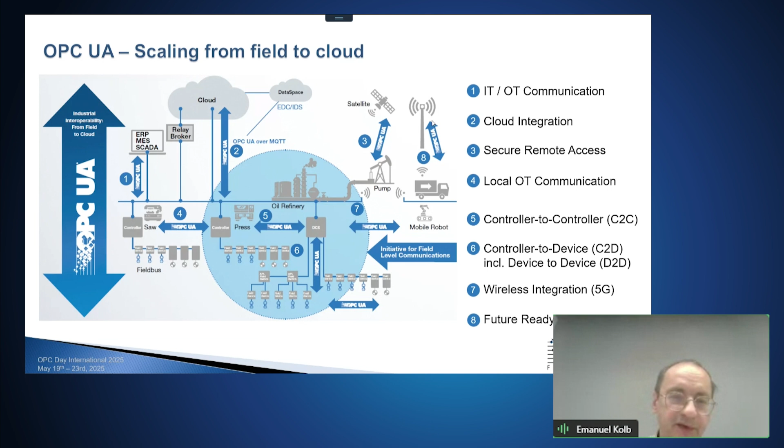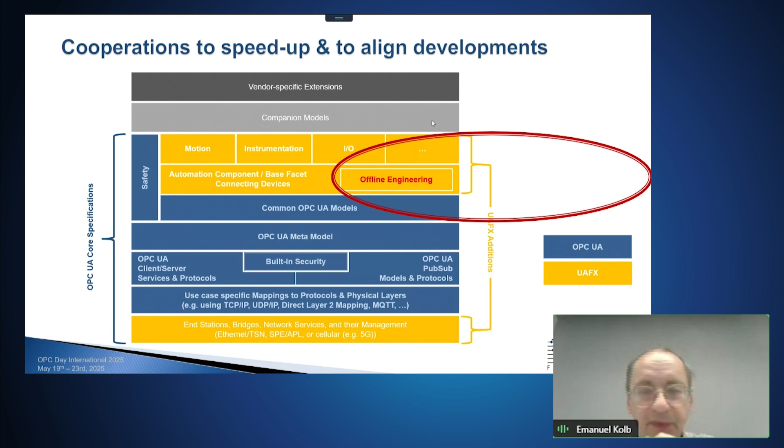And this also brought UAFX to the decision that we have to support offline engineering. We have to make ideas about engineering tools. We maybe even have to provide software tools for supporting engineering in a plant. And this was from the beginning seen as one important step. And as you see here, the technologies used.

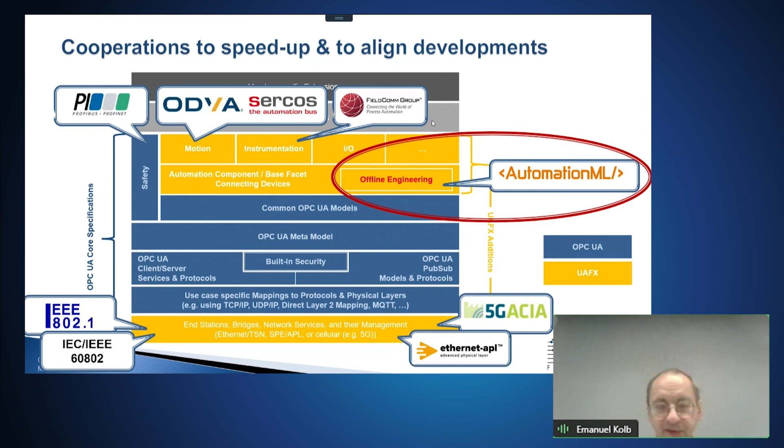One technology that came new into the OPC UA world is AutomationML, which is an engineering language for modeling information for a wide area of engineering topics, going far beyond what OPC UA is currently doing. So the interesting challenge of this project was to bring the AutomationML modeling and language together with what OPC UA is offering, the OPC UA information model. This project was started in a project group that in the end created the Part 83 standard of UAFX.

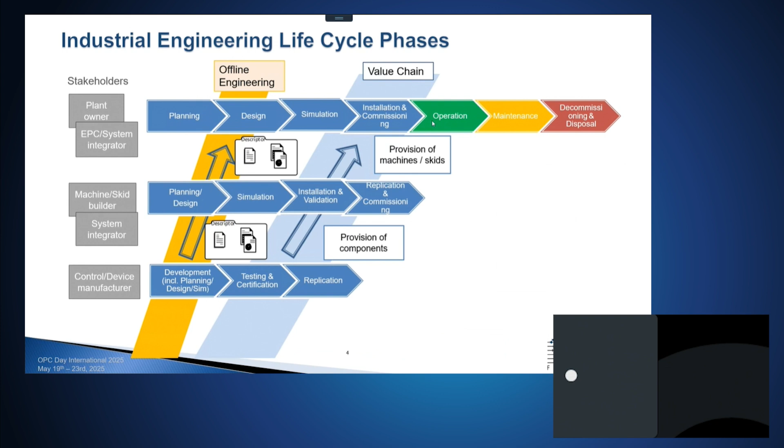Making a little bit more of a point on this, as you see here, the classic value chain for a plant is selecting products, selecting automation devices, integrating them into a larger module system, and finally bringing them to the plant, wiring everything together, pressing the start button, powering it up, and then it should run. But it will only run if you do planning before, and this is the orange chain here, which is ongoing in parallel. Everything you do, you plan in a digital way before with some tools.

Even if you have not procured the hardware yet, you have to deal with the devices. You have to select your products based on paper information. You have to create the engineering of your controllers, maybe without the controllers even in place, and later, of course, bring this together with the hardware. So this is the digital value chain that accompanies the real value chain where you make the production site happen.

And here, a new concept was developed in UAFX, which is called the descriptor, which is a way to share and encode the information you create during engineering. It's not a digital twin. In the beginning, we discussed going in that direction too. It's more a kind of data collection information model that helps you keep your information together. It's not as high level as a digital twin, but I think it could also contribute to a digital twin in the future.

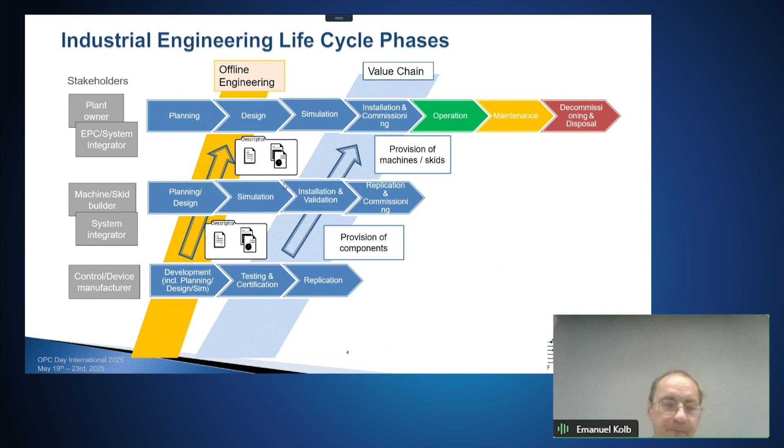And here you see a little bit of what our project group tries to bridge. We try to bridge current industrial engineering, which uses a lot of different modeling concepts, with the online running stuff, the UA server, where the OPC UA information model is and where the communication happens. So we try to bring this together and make a fusion out of that.

And as I said, the two concepts we're inventing here are, on the one hand, the descriptor as a kind of container for collecting and sharing engineering information, and on the other, a mapping where we bring the OPC UA information model language together with the AutomationML language.

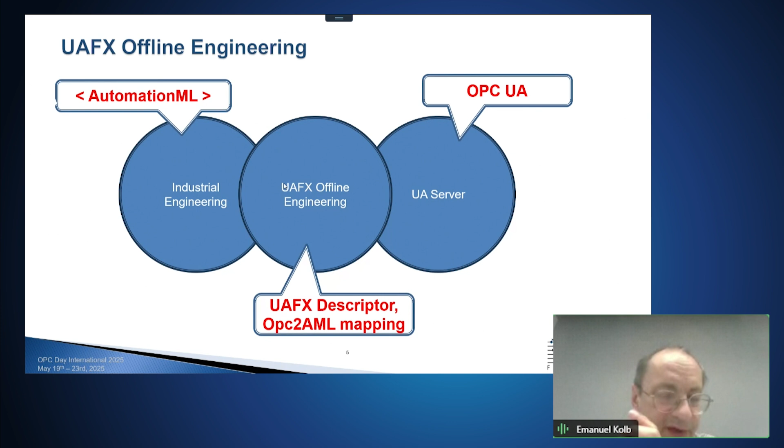And this is going a little bit into detail about where a descriptor is used and what is the basic use case, a kind of baby use case for sharing information. This is one of our first examples we did. It's about creating a control engineering project.

So a control engineer A would do some configuration for a controller which may not exist yet, and share this information with another engineer for another controller. And within this data that gets shared, there is the information what data a controller exposes, what data it needs, and the other engineer can then provide the necessary information and receiving input-output configurations to consume or provide the data needed.

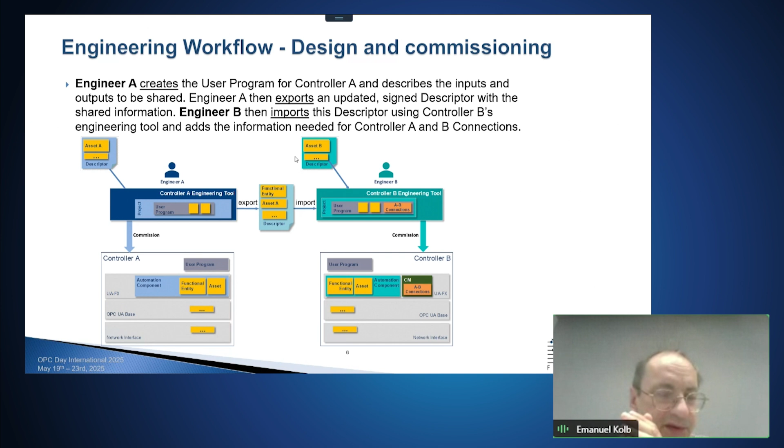So this was our first step, but as you see, in a real project a lot of things get exchanged. The exchange is quite complex. You may not want to integrate one controller. You have multiple controllers from multiple vendors to integrate, and it gets more and more complex. But this is a basic step that we defined as a start for the information exchange.

So what is a descriptor? This is an interesting question. We are basing the descriptor on the AutomationML concept of an AMLX container, which is already part of AutomationML. It's basically, you could say, a zip file. And we have two types of basic information. The one is formalized information that is derived from an OPC UA information model encoded in AutomationML. This is one of the big chunks here.

And the other thing is a kind of open package container where you can attach vendor-specific documents like drawings, manuals, even data sheets, and then you can even have a kind of descriptor in descriptor, a hierarchical way to put information together. You can have links to all kinds of contents. We have a manifest that identifies the whole thing. And in the end, we require a digital signature on each container so that you know who has created it.

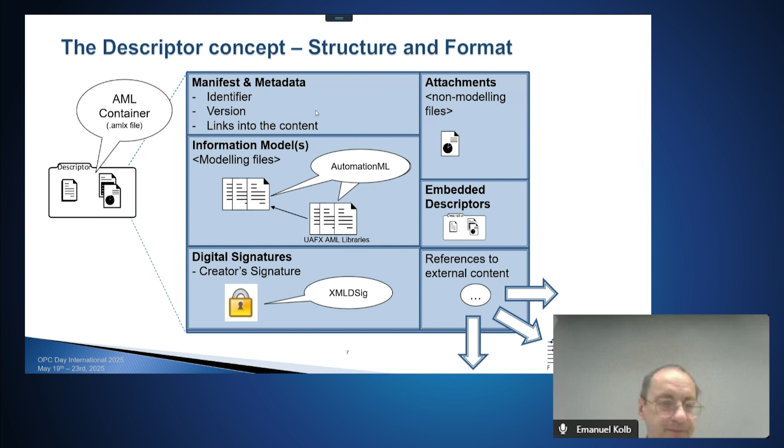This is already defined. It was released in Part 83 already, and we described this concept. We described the rules, how to do this. We have some information on how engineering tools should work with this. It's based on the Open Packaging Convention standard that was created by Microsoft. It is used in some areas, for example in the Office documents. It's used in AutomationML, in the asset administration shell, and also in MTP. So it has a big acceptance in the industrial world.

And we're using the AutomationML language, which is also a long-term accepted standard for engineering. And as I said, the concept is open for vendor-specific content, so that things that need to be shared but are not yet encoded in information models can also be included.

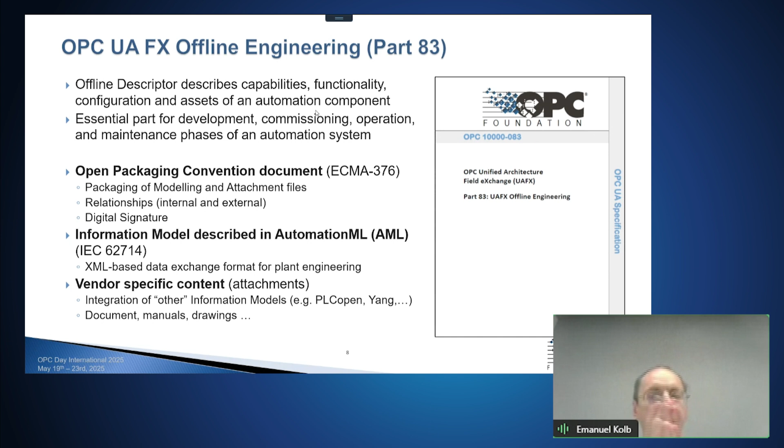So now I would like to talk a little bit about phase 2, which is the controller to device in OPC UA, where, starting from the existing UAFX concept, we want to get much more concrete and a little bit more stringent, and handle parameterization, networking, diagnostics, and also look into the area of motion, I/O, and instrumentation.

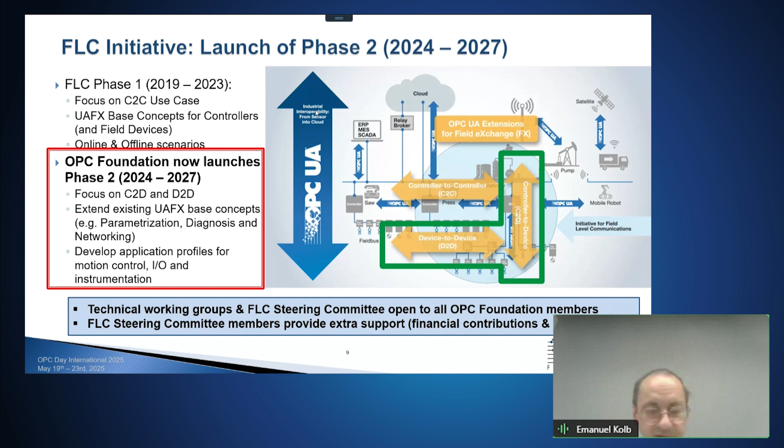And there are two things, when we started looking into this, that are quite important and critical, where we need to provide more information to the engineering OPC UA world. The first is that we need to handle products in a better way than we currently do. Therefore, we have a sub-concept of the descriptor called product descriptor. This is exactly where you start the engineering phase, so it is a very important start step. Without it, you would always write a descriptor from scratch, which is not efficient enough.

The other thing, a little bit related to this, is about constraints. We have in OPC UA a very flexible and comprehensive information model based on types, attributes, properties, references, and so on. If you know this in more detail, you know it's a good way of modeling information, but it's more a kind of static modeling, and it sometimes lacks the flexibility to express a specific engineering need. For example, every time you want to restrict the range of a value, you need to invent a new type, an enumeration or a specific range type.

And so the closer you come to reality with your information modeling, the more you need to invent types, additional objects, and so on. And this leads to a kind of explosion of your modeling.

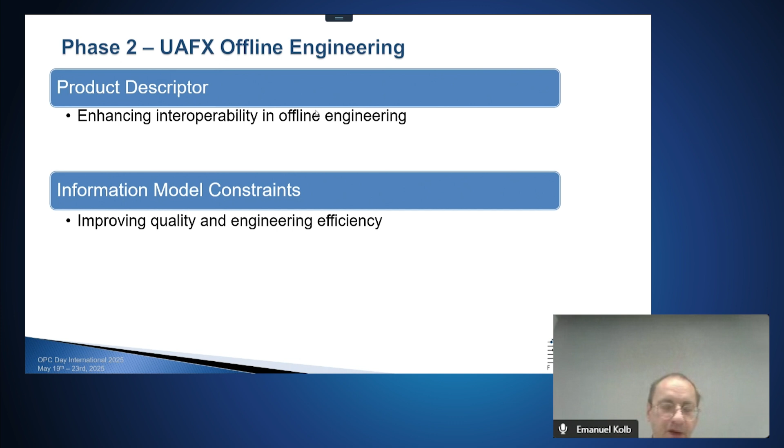In the certification process, it will be checked that these product descriptors contain the same data that is in the hardware, and that they describe the capability needed for engineering. So it's about capabilities, types and ranges, and this will be certified. And in the end, these descriptors will be uploaded, mostly by the automation component vendors, to the OPC Foundation website, where we make them available with links. And so it will be part of the OPC Foundation catalog.

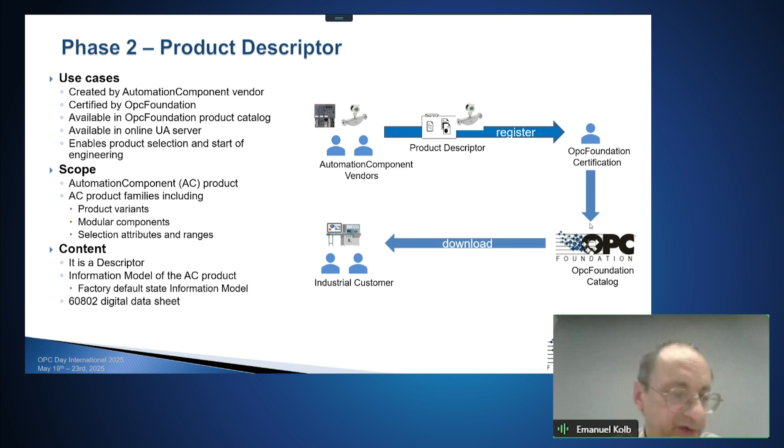Coming to my next slide on the information model constraints. I would say, with a rather general statement, a constraint is a restriction on an information model that goes beyond only defining data types and structures. So it's an additional thing that gives you more refinement on what you really want to do or what you really provide. And this can be additional range restrictions on values, it can be even dependencies between values, or restrictions on structures.

So something like: if you select this option, then on another dimension the values you can select as a next step are changing. This is something that typically can be handled with constraints.

And what you see here on the right side is a little bit: if you get the task to deliver this kind of coach to a transportation company, and you only get the width and the height as the input data, you can end up designing the wrong coach, because in the end you need to fit into a kind of tunnel circle. And this is a picture from the tube. And so constraints give you the opportunity to refine your requirements and make it more realistic that somebody else will deliver you the right thing.

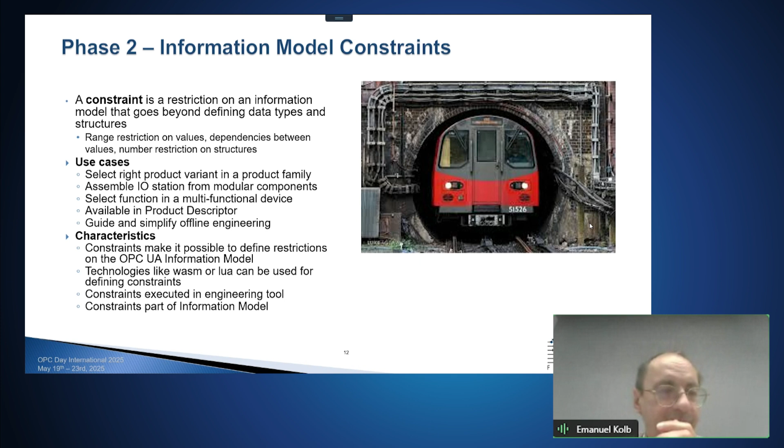What we also would maybe like to point you to is this last link here. We have a tool, and this is constantly developed further, that helps you to create an AutomationML library from an OPC UA node set. So this could be important, I would say, for integration into engineering tools. We started working also in the opposite direction. So with this tool, or we will have another project for that, to bring AML information that was formulated with OPC UA back into a node set, for whoever would like to have that.

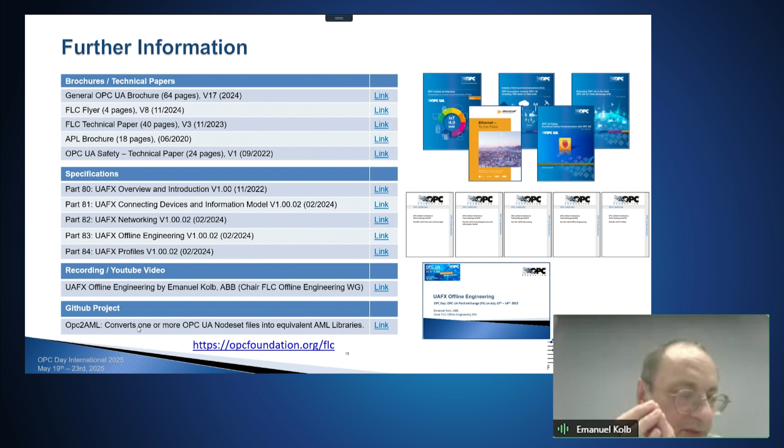We're also working on tools for signature. As I said, a descriptor is signed, so engineering tools would like to use a signing library to get a signature for their output. And we started doing here also some libraries. And what I forgot to say is that we also require for the signature a trusted timestamp server in the future. And for that we are also working on the tooling. And so that would give a head start for members of the OPC Foundation to use and integrate that in their engineering tool.